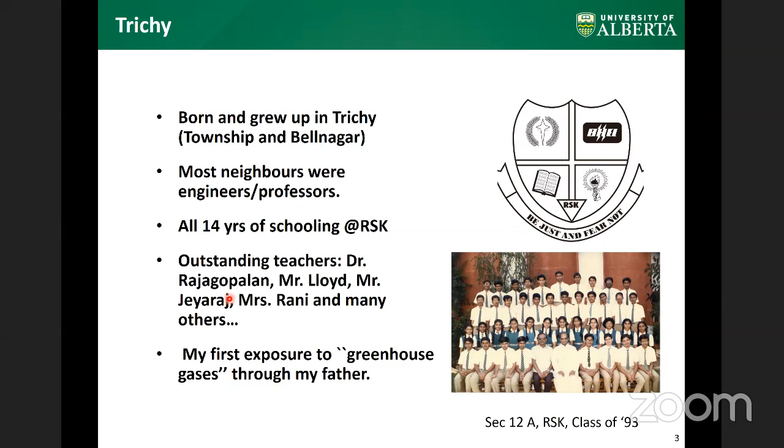So with that, I'll move into my technical talk. I've split the agenda into two. In the first half, I'd like to talk about CO2 capture, a very broad overview - I will not go too deep into that. Then in the second half, I'd like to talk about our research in this area: what are our contributions, and specifically our work on adsorption processes for CO2 capture. I will introduce what adsorption processes are, what the challenges are, and how we are contributing to overcome some of these challenges. Of course, this entire talk will make sense only if we assume that human-induced climate change is real and that CO2 plays a key role. I do believe that this is true.

This is a point of contention all around the world. It has the power to change elections. If you don't think that this is true, I would still urge you to look at this talk as a purely scientific talk, because the engineering challenges we face here are significant.

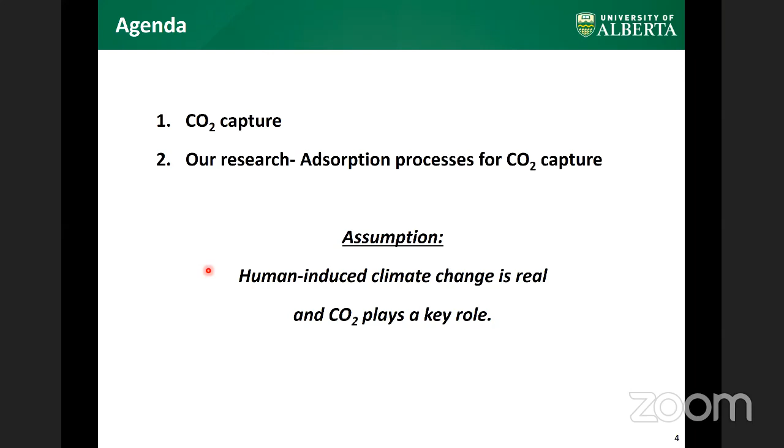This has continued to climb, although this year has been one of the first years in a long time where CO2 has actually taken a dip because of the COVID pandemic. But still, atmospheric CO2 compositions and concentrations start rising, and this is going at an alarming pace.

Many people consider a 1.5 degree change to be fairly catastrophic, in the sense that irreversible climate change could happen under those conditions. And many countries globally have seen this, have accepted this, and are taking measures to control it.

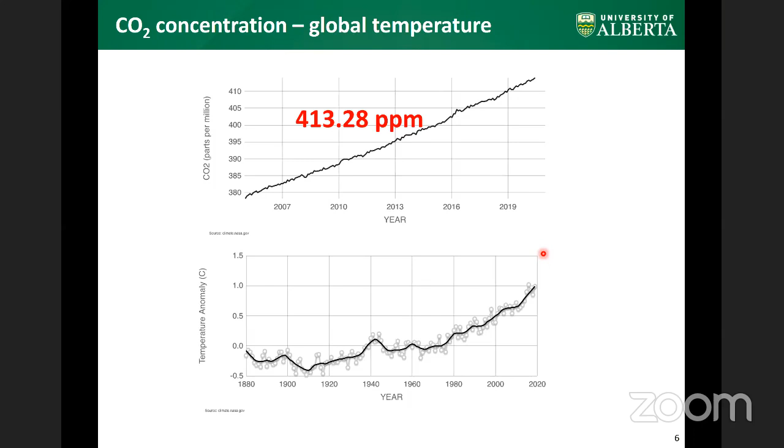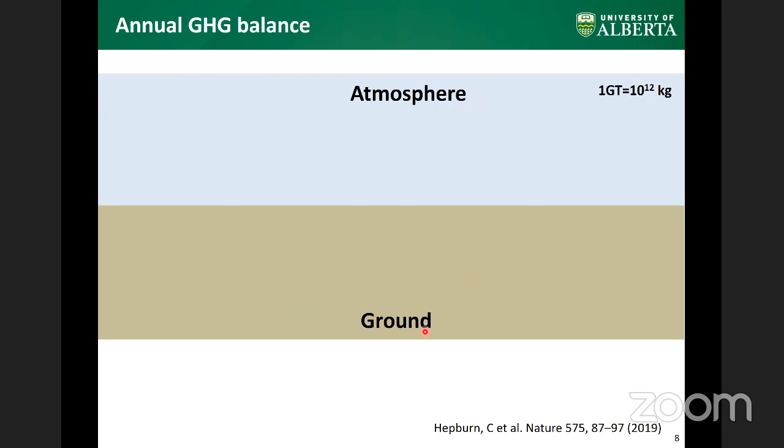If you consider the atmosphere and the ground, you can see that there are several contributions from the ground to the atmosphere, with energy, industry, and transportation being the big hitters. These are all represented in gigatons of CO2. One gigaton is 1 billion tons, or 10 to the power 12 kilograms. So what we are talking about is a fairly large amount of emissions that happen because of human activity.

As you can see here, this contributes to about 39 gigatons. For simplicity, you can think of 40 gigatons as approximately the amount of CO2 that goes from human activities on the ground to the atmosphere. Of this, India contributes about 2.37. On a global scale this is a significant number, but in terms of per capita emissions it tends to be low, and that is also reflected because our energy needs have been much lower than many other places.

Of course, there are also sinks, which means there are activities that take the CO2 and sequester it on the ground. This happens in two modes: ocean and land. These two are the biggest contributors, and they contribute to about 21 gigatons of CO2. So what you see immediately is that we are adding 39 into the atmosphere, and nature removes about 21, and this is on an annual scale.

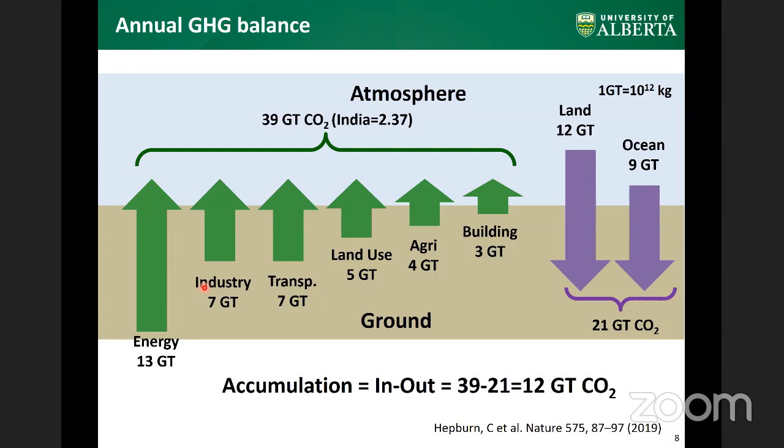So let us look at a conventional system. This is a very oversimplified picture of what happens. Traditionally, and most of the audience are no strangers to this, BHEL is one of the most renowned companies, and especially Trichy is the center for boiler making. So a lot of power generation happens through the contributions of many of you attending this talk.

What you see here is fossil fuel goes into either a power plant or a chemical plant, and as we all know, fossil fuel contains predominantly carbon and hydrogen. These are the two big atoms we are interested in. The way I've learned from colleagues much more knowledgeable than me is to imagine fossil fuels as containing two atoms, essentially carbon and hydrogen. Hydrogen is where you get the energy from, whereas carbon gives you the density.

So the higher the percentage of carbon, the denser the hydrocarbon tends to be. That is why methane has four atoms of hydrogen to one atom of carbon, whereas oil contains approximately CH2, give or take - so four becomes two - and coal contains CH, so essentially for every atom of carbon you have one atom of hydrogen. That is the reason you see that as you go through this chain, the density changes, and of course you make the transition from a gas to a solid phase.

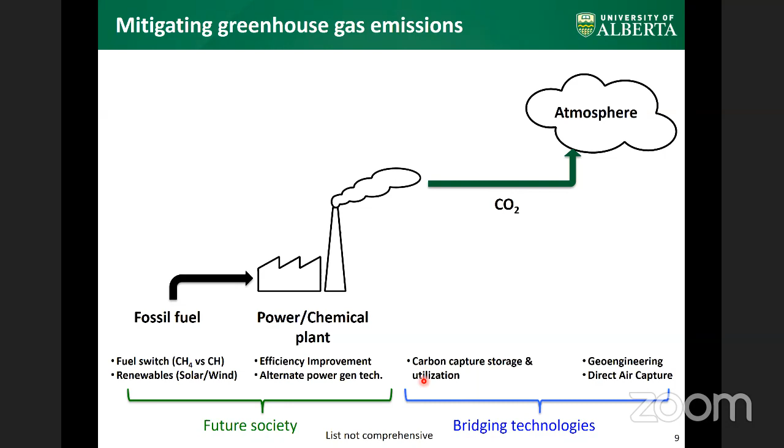So many scenarios that people are looking at consider fossil fuels being increasingly used only for producing chemicals, whereas we look to other sources for producing energy or power. Provided we have these carbon sources, and if we want to stop these carbon molecules from ending up in the atmosphere, even in those scenarios, carbon capture and storage becomes an important tool. This is the topic I'll be talking to you about today.

So what is the concept of carbon capture and utilization? Let me show this to you in a very simple schematic. I should thank Professors Karimi and Farooq from NUS who helped me develop this framework. The traditional framework is the following: you have a power or a chemical plant.

We take fossil fuels or any carbon-based fuels, and the main idea is to produce electricity or energy, and/or chemicals if it's a chemical plant. What we produce in addition to power is a CO2 stream, which is typically called flue gas.

Depending on what you're burning, you can end up with CO2 concentrations anywhere between 5 to 40%. For example, if you burn natural gas, your CO2 concentration typically is in the range of 4 to 12%. Coal gives you anywhere between 12 to 15%, and so on.

So you have a fairly dilute stream, and this is where the big challenge arises. The idea is that we build a capture plant to concentrate the CO2 that comes in and to enrich it, typically beyond at least 95%, because any contaminant could affect your downstream operations, and you'd also spend a lot of energy if you want to store the CO2 underground. You have to pressurize it to about 120 bar, and you might end up spending a lot more energy compressing everything but CO2. So there is a huge necessity to concentrate this from about 5 to 95%.

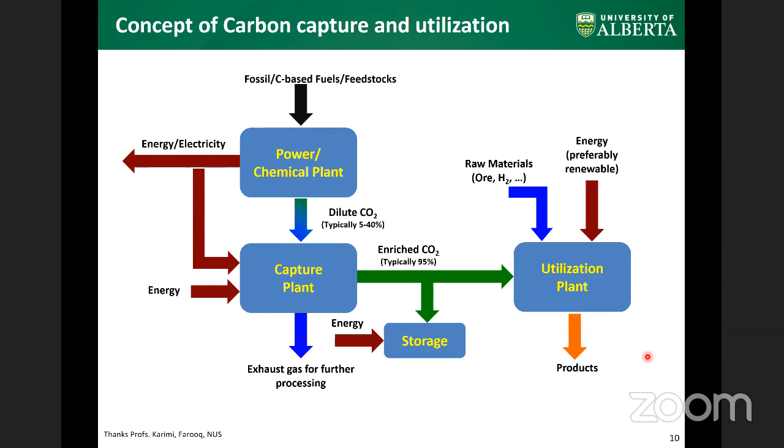And then you make products. The products we produce have to have long-term sequestration potential. For example, a common assumption is that we can put this into soft drinks, or even convert it to urea. But if you look at the life cycle of these approaches, the CO2 molecule eventually ends up going back to the atmosphere within a very short period of time. So we need to think of very long-term sequestration potentials.

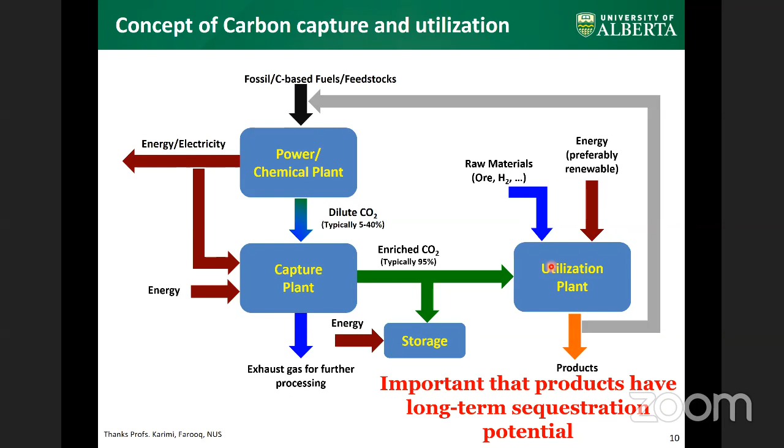The other point to note is that parasitic energy, shown here in red, is rather unavoidable, and we need to find better sources of this energy.

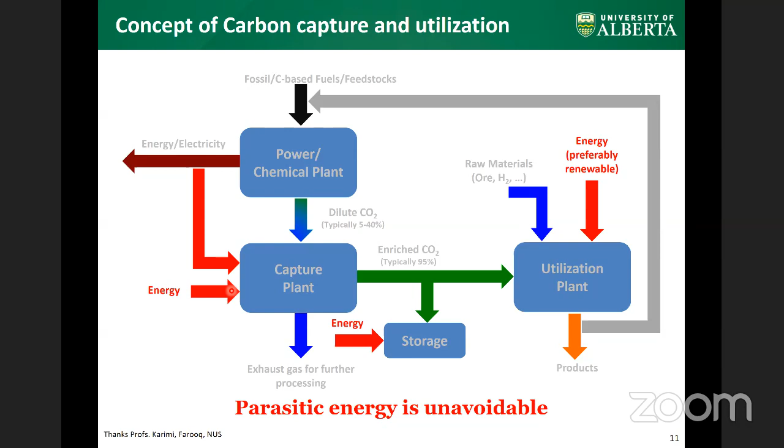Here is the carbon capture and storage schematic published by the IPCC, the Intergovernmental Panel on Climate Change, a long time ago. I would say this is a fairly reasonable representation, although the specific components have evolved over time. The idea is that we start with many raw materials such as coal, biomass, oil, and gas.

So they all come into industries, electricity, cement, and other industries. And the CO2 that is being produced here can be stored in different ways.

For example, ocean storage is one where we try to store the CO2 in saline aquifers under the ground. Geological storage is where most activity has happened.

So these are depleted oil wells. It's a place where there is space available, and there are also formations which have to be monitored and characterized. The idea is to pump CO2 under the ground, cap it, and monitor it to make sure it does not come out.

This has been a fairly controversial subject as well, because people are naturally worried that there would be cracks that happen in the ground and CO2 might come up. But on the other hand, there are also several projects that have successfully managed to do this.

Of course, the other option is to use it for what is called enhanced oil recovery, where you try to pump CO2 to remove oil that was otherwise difficult to remove. In these mass balances, you very often see that there is still a net CO2 storage potential as compared to the amount of oil that you will take out. So very often these aspects have taken shape.

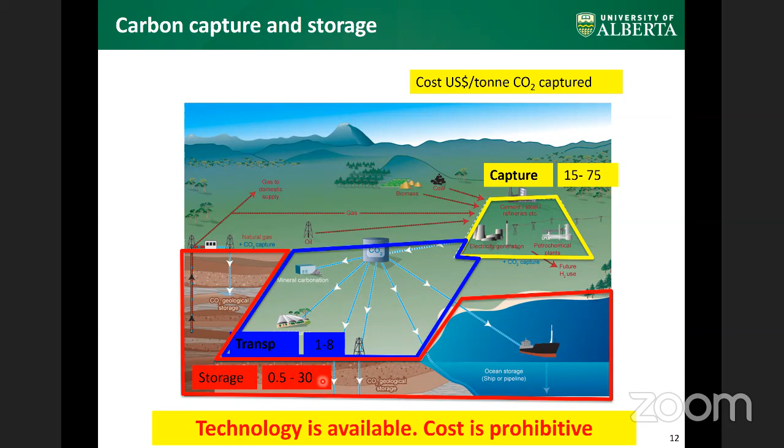So the transportation takes anywhere between $1 to $8 per ton. And finally, storage is anywhere between $0.5 to about $30. So if you look at this entire chain, you immediately realize that capture is where most of the expenses are. But it's also important to point out that there is technology available for each of these steps, it's just that cost is generally what is prohibitive.

So if you look at carbon capture, especially in power generation, we could look at it in these ways. There are different ways in which power is generated. The most common, I would say the biggest contributor to power, is what is called post-combustion.

These are typically the kind of combustion cycles that we see in most places, because this is the cheapest, and this has been historically the most advanced in terms of history of advancement.

So the idea here is that we burn fossil fuel in the presence of air, which contains about 20% oxygen and about 80% nitrogen, give or take. And what you produce in the combustion is CO2 and nitrogen, and of course you produce power.

And the idea is now to concentrate the CO2 here. So you put a CO2 capture unit, and then you compress the CO2 and send it out for storage. So this is called post-combustion.

This is important because, as you can see here, the CO2 capture unit is built downstream of an existing combustion unit or existing power plant. So this means it can be retrofitted to any available power plant, and there is a lot less interaction with the power plant itself. So in terms of reliability, it tends to be fairly high.

But on the other hand, the biggest challenge, as I will talk to you later, is the conditions at which you get your flue gas.

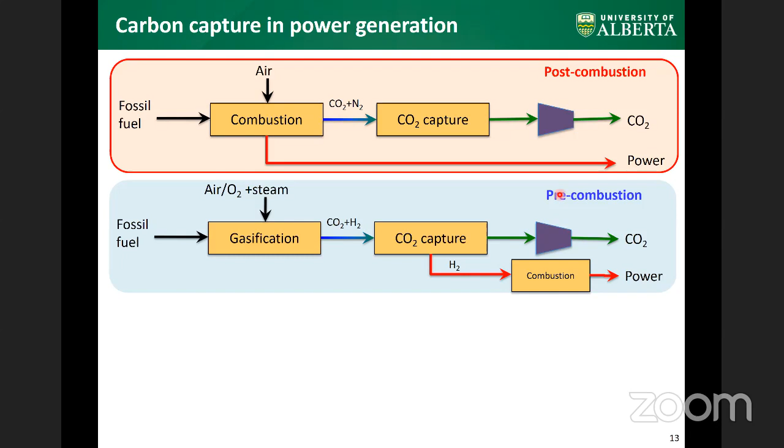The third one is oxy-fuel, where you take air and separate it, removing all the nitrogen so only oxygen goes into the boiler, and you burn that with the fossil fuel. What you get here is fairly high purity CO2. Of course, this means the temperatures here would be very high, and there are also other operational issues, as I understand. There is a possibility of recycling CO2 to address that. For some reason, oxy-fuel has not taken off very much in the industry.

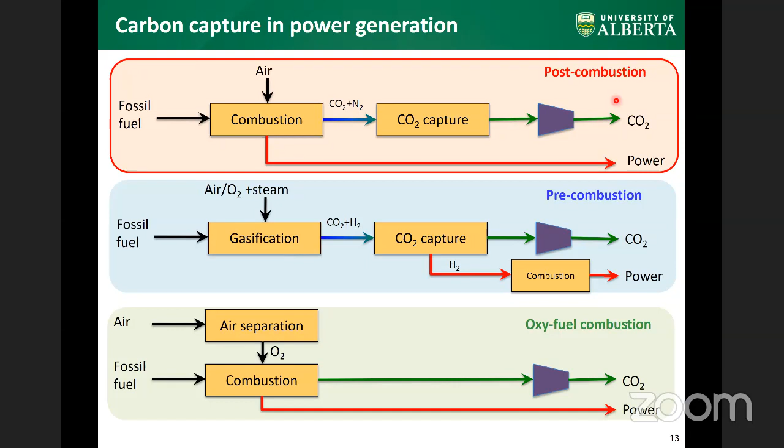So what I'll do is focus on post-combustion for the rest of my talk. This is a typical plant, I don't have to explain this — I'm sure everyone in the audience today is involved in this in one way or another.

This is a typical coal-based power plant. I'm looking at a classical 500 to 550 megawatt power plant. You burn coal in the presence of air, and it produces close to 55 to 60,000 tons of flue gas per day. A good number to think about is for 500 megawatts, we produce close to 10,000 tons of CO2 per day. The challenge is that this comes out at atmospheric pressure and at or around room temperature, depending on emission standards and how much heat has to be recovered.

You'll see variability in this, but this is a good picture. So we need to now perform the CO2 capture. We need high purities, and if you look at some requirements, for example the US Department of Energy, considered a big player in this, they set regulations requiring that 90% of the CO2 that comes into the plant ends up in the product — what we call recovery or yield. As a chemical engineer, you immediately realize that as you expect to remove more and more, the challenges increase. This has to be done while removing as little power as possible and with as little capital expense as possible.

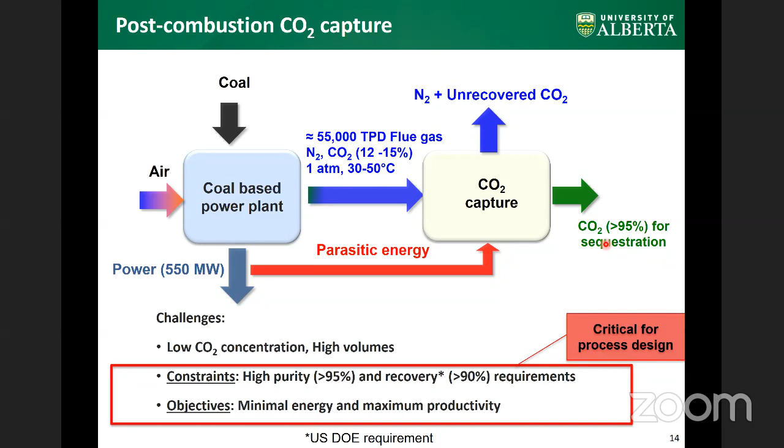The two projects that I would like to highlight, not just because they are from Canada, but these tend to be the biggest in scale. One is the Boundary Dam project in our neighboring province, Saskatchewan.

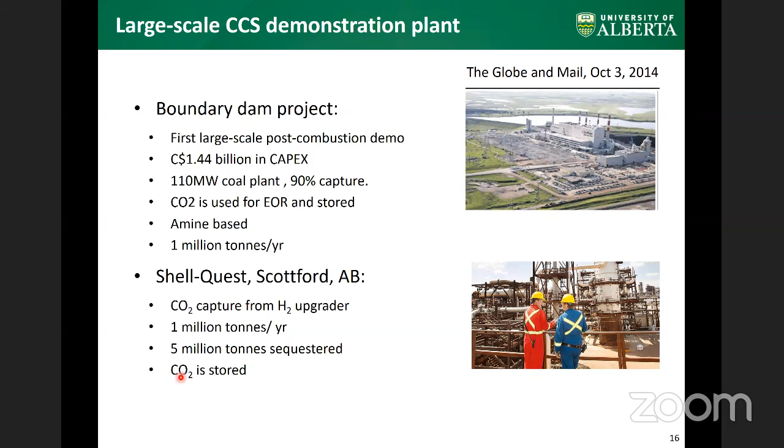So this is the process at Saskatchewan, the Boundary Dam. This is a classical process, one that is taught in undergraduate classes and heavily used in the industry.

So now we have this technology. What is the challenge, right? This is a mature technology, but the amines are very prone to degradation, and this is a very acidic environment, so the walls of these huge towers tend to corrode.

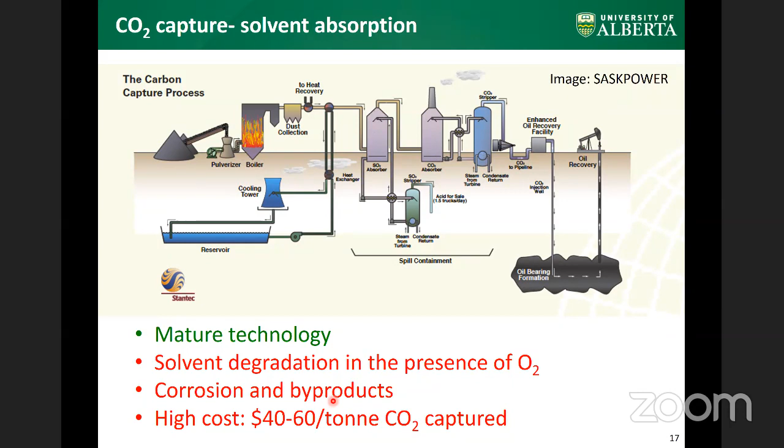So what is it that we do in our lab? This brings me to part 2 of my talk. I've given you an idea of what CO2 capture is, why it's important, what technologies are available, and what the challenges are with those technologies. Next, I'm going to talk about what we are doing in our labs, so you also get a glimpse of the kind of activities we do.

So we use a different process, which is called adsorption. This is not new — I think most of us have an adsorbent at home in one way or another.

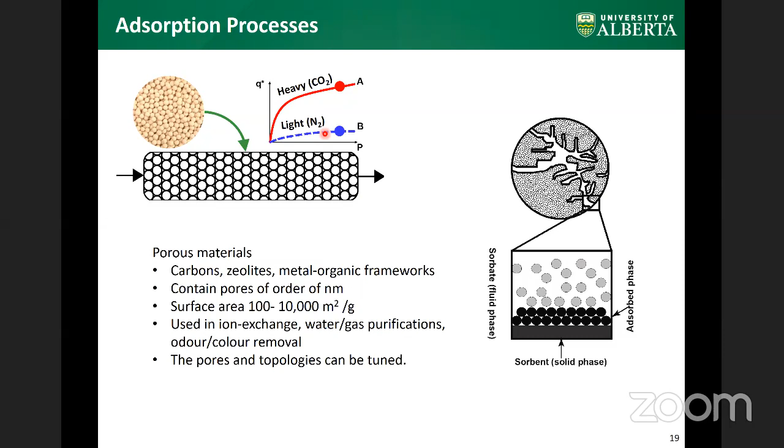So what we do is take some of these materials, put them in a column like this, and send a mixture of CO2 and nitrogen. I'm going to show you how this transmits through the column. Let me see if I can get this started. As you can see, originally the column has none of A and B. When you start introducing the mixture, since B has a lower affinity to the solid, it propagates earlier, which means if you start measuring what comes out of the column, you start seeing...

...a pure nitrogen breaking through the column. If you wait there long enough, you will get nitrogen in pure quantities, and slowly the CO2 will start coming out. So what you have here is an opportunity to collect the nitrogen in pure form.

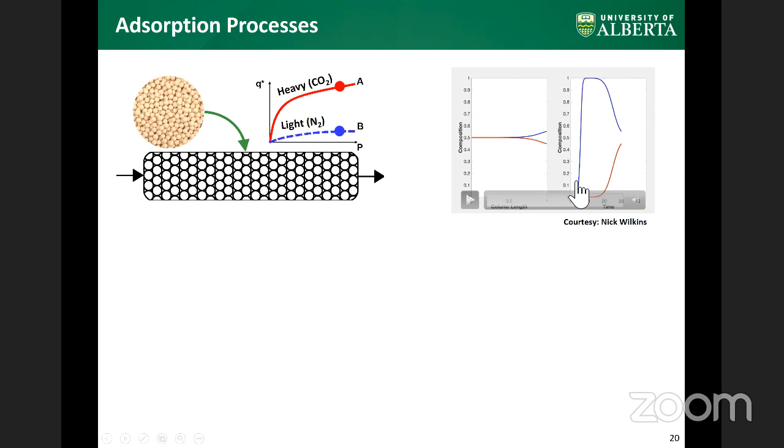This is in fact the exact technology used in medical oxygen concentrators, which have come back into the light especially after the pandemic. In this case, you use a zeolite which absorbs nitrogen but does not absorb oxygen to a great extent. This can be used to make oxygen concentrators that typically concentrate oxygen up to about 93 to 95%. It's also used in huge hydrogen plants where hydrogen is purified.

The point I want to make is that the technology is available to go anywhere from 3 normal meter cube per hour to about 400,000 meter cubes per hour. This is a huge range, but still not huge enough for a process like CO2 capture that we've been talking about.

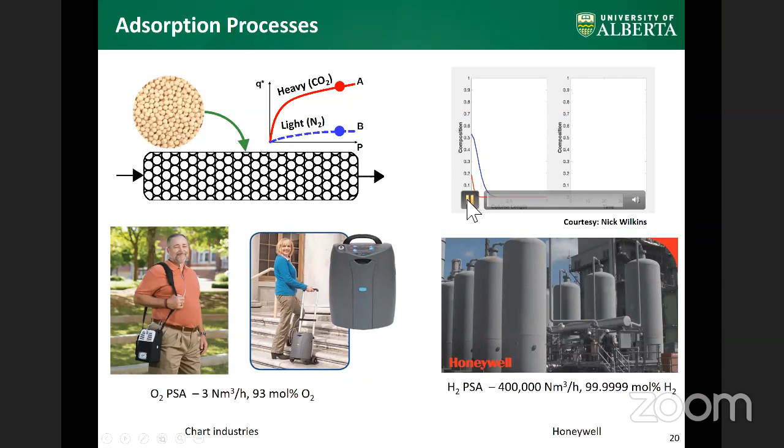In these processes, the cycle alternates between two steps: adsorption and desorption. This is because when you let the entire column become saturated, beyond a certain point you cannot use the solid anymore since it's completely saturated. So at that point, you have to clean it. This is exactly what they'd call in the boiler industry, for example with an ion exchange resin, a backflush. When you do a backflush, you're desorbing everything.

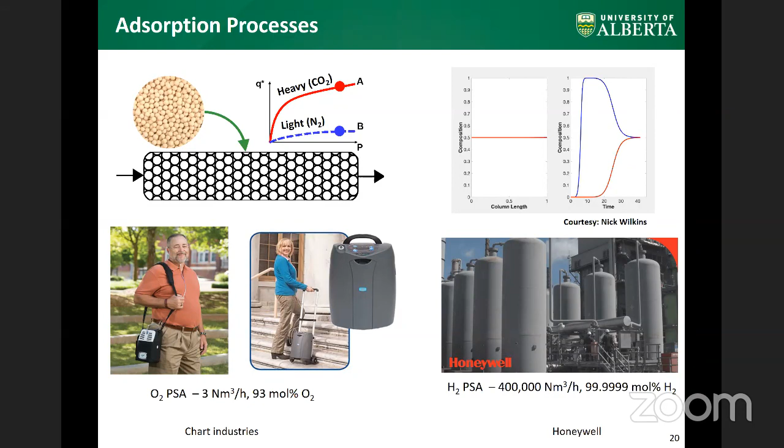But when you're dealing with a gas, you have two main ways to do this: you can reduce the pressure, or increase the temperature. Reducing the pressure is called pressure swing adsorption. Increasing the temperature is called temperature swing adsorption. Both are available options. Our group has worked a lot on using PSA for CO2 capture.

Before we go through this, I'll highlight that if you put in a feed, you get two products. One is called the raffinate product, and the other is called the extract product.

If you compare adsorption processes to those taught at undergraduate level, like distillation and absorption, the key difference is that this is an unsteady state operation. So there are no explicit steady state design principles available to design these processes. This is a huge issue when designing these processes, and that also explains why they're often not taught at an undergraduate level in a rigorous manner, because in chemical engineering design we almost always teach steady state design, whereas these processes inherently operate under non-steady state.

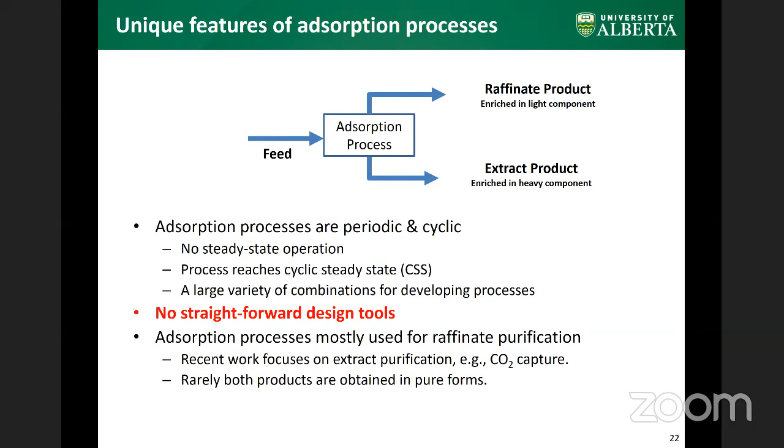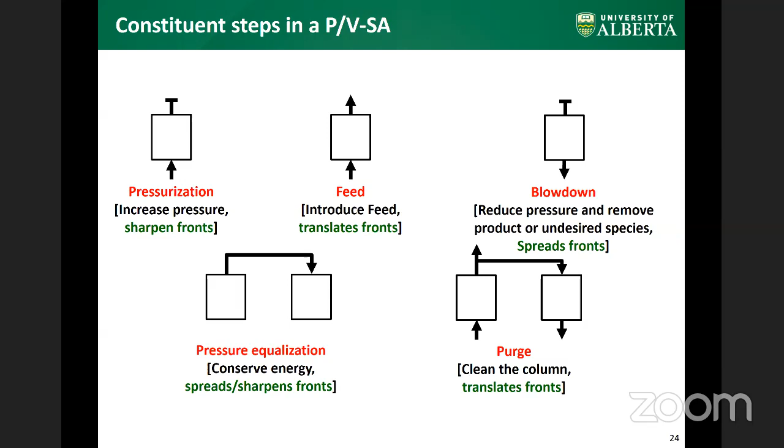So what you see here is that these tend to be like building blocks - you can start combining these steps to make a process. For example, here's a very simple process, but the point I want to underline is that you have several variables to play with. You can change the velocity at which you put this in, you can change the adsorption time, and you can change the pressure levels at which you operate the entire system.

So in summary, for a very simple process like this, you already end up with about 8 operating parameters. The question of how do I pick these 8 operating parameters so that I maximize the potential of the system becomes a fairly challenging problem.

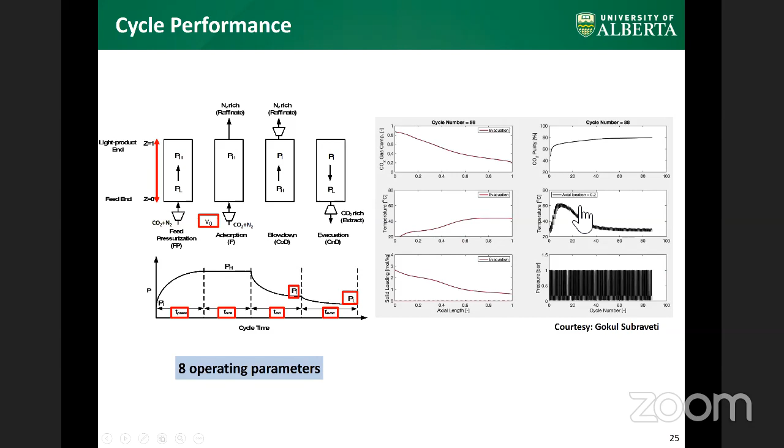And this is exactly where it becomes difficult - if I give a certain set of input variables, it becomes very difficult to predict what the process will give us. For this, I'll skip ahead for want of time, but what we do now is figure out how to pick these parameters.

What we do here is a technique called optimization. We have a full model - essentially the set of equations I showed you before - and we have what's called an optimizer. The optimizer takes a random combination of all of these and sends it to the model. The model evaluates how the process will perform, and then it throws it back as performance indicators. These performance indicators could be energy consumption of the process, for example, or the purity of the CO2 that I achieve for a given set.

If my purity does not reach a certain value, I don't want that to happen. So if you do this over thousands of unique combinations, we get what is called an optimal front. Each of these points is a unique operating condition. I'm plotting purity and recovery. In any process, I want high purity and high recovery, so I want to be as close as possible to the top right corner. As the optimizer keeps doing this over and over for thousands of operating points, you slowly end up with what is called a trade-off plot, called a Pareto curve, named after an Italian scientist, Pareto.

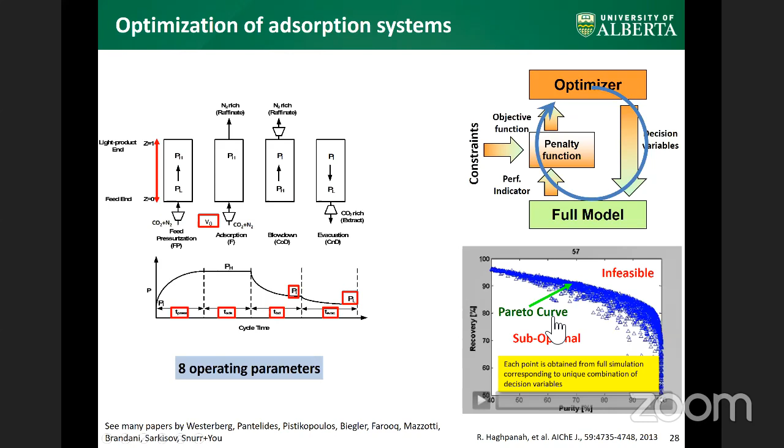What you see here is that this boundary separates the region into an infeasible region, which means with this process and the material I have chosen, I cannot reach any point here. I have to be contented working in this region, and if I want the best performance of the system, I want to be working exactly on this curve. So this has stopped you from doing thousands of experiments and spending time and capital on human time, machine time, and consumables, and it has already given you a region where you should be looking to operate this system.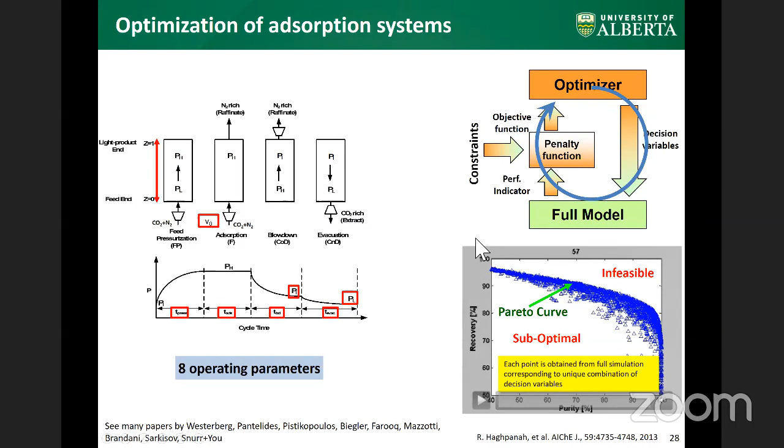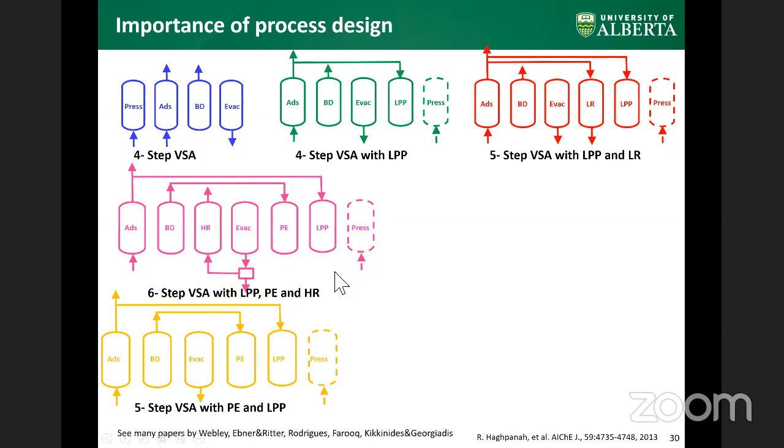Now you can start building very complex processes, and if you ask me which of these is going to be the best, it's very difficult even for experts to say. Each of these colors represents each of these processes. The same material operating within the same operating range, but just changing the configuration — the x-axis is purity, y-axis is recovery — can completely change the outcome of the process.

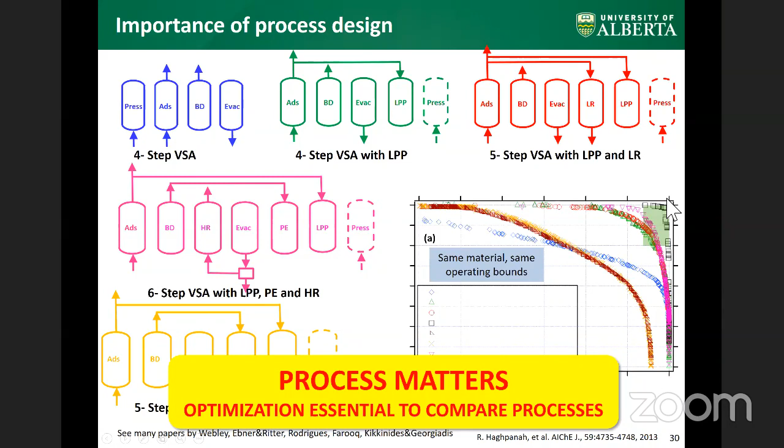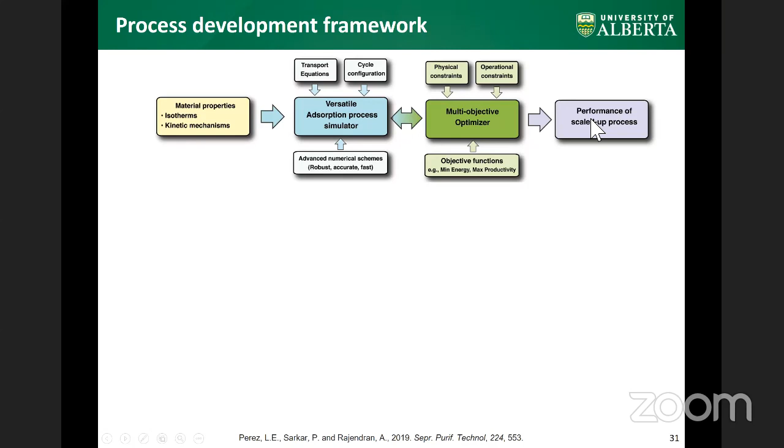What we have developed, and when I say we, it is the scientific community, the whole goal is to go from material properties, using model-based optimization, to predict what happens at large scale. And of course the big question in your mind is, does it work? The answer is yes.

For example, this is a project we did with a company here that makes oxygen concentrators for aquaculture. We made measurements based on 350 milligrams of material, and they ran experiments up to about 750 kilograms of material. We can predict, with no extra fitting parameters, the purity from this 750 kilogram machine to about 1%. The recovery we were off by a few percentages, and the energies are very close. This is a 2 million times scale-up, and we do this to make sure we are looking at the right ranges and the models are reliable.

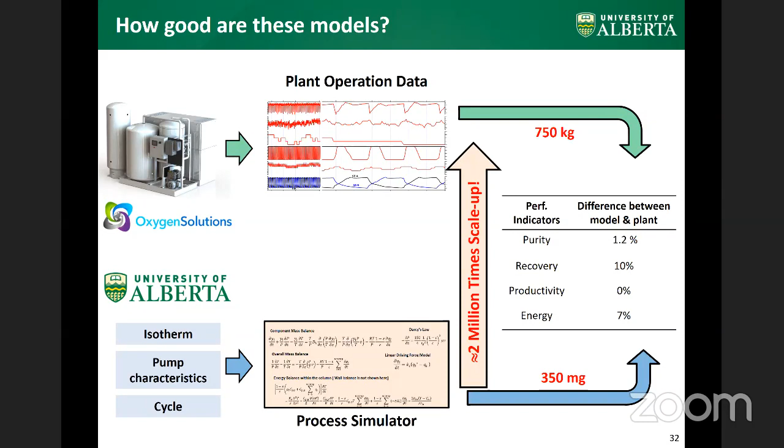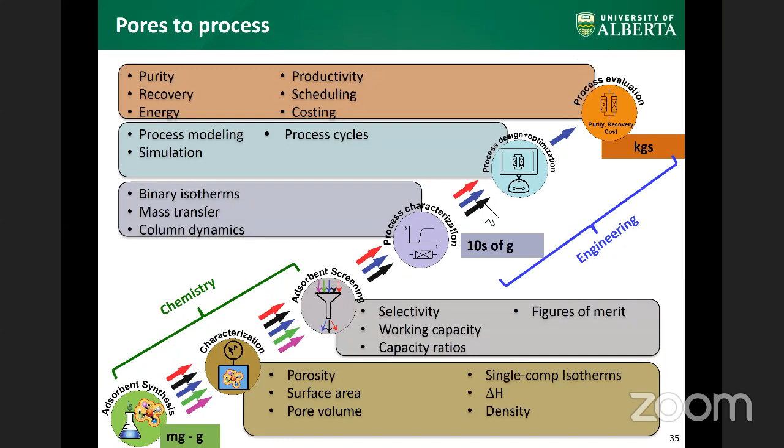Maybe I'll skip this for the time being and gladly answer it at a different time. But what I wanted to emphasize is here.

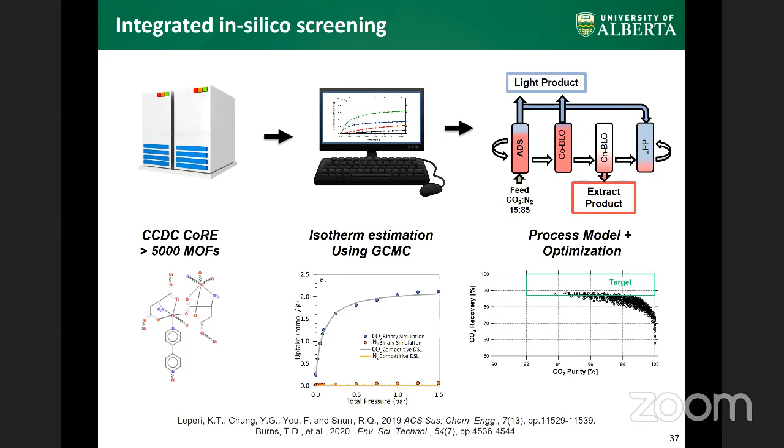We are at a position where, based on crystal structures which chemists measure on very small quantities, it is now possible through computers to predict thermodynamic properties and feed them into computer-based process optimization, so we can screen over thousands and thousands of these new materials and ask which of these materials makes sense and which should be scaled up. We did this by screening a database containing about 5,000 specialty materials called MOFs, and we were able to identify a whole bunch of adsorbents that can do better than the state-of-the-art liquid scrubber. This was a huge effort, representing about 5 million unique combinations, and it took us a couple of years of computational time. But the idea is that you could now use these approaches for making decisions about which material to choose.

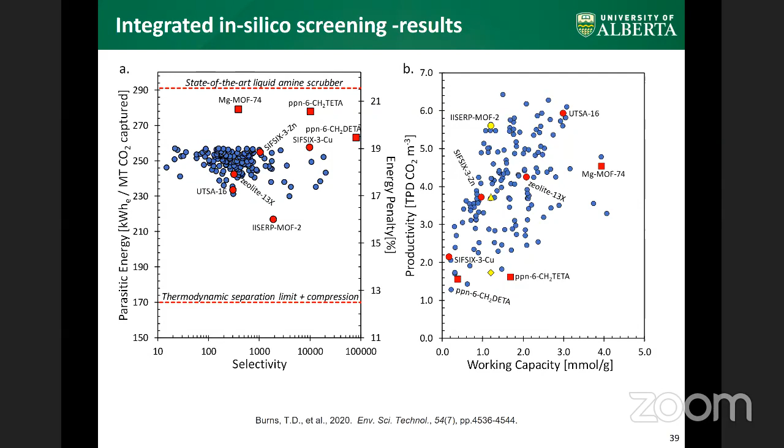So I'll summarize. When I summarize, I have to be very clear that the best design is to avoid the creation of any waste.

So if you can avoid CO2, that is the best way to do things. But if it is unavoidable, then we have to think of approaches like the ones that I have mentioned. And there are sectors in power, chemical and cement that cannot be replaced by renewables. And CCS is a technology that allows us to reach net zero emissions.

And finally, CCS is an expensive area, but that is why there are a lot of research projects going on, and it has to happen both in academia and in industry. Ultimately, I would say the price of carbon will decide whether this will work or not, and this entire thing makes sense only if carbon has a price.

This is also to let you know that if you have young people that are interested, clean energy is a big challenge. It's a global challenge. And if they would like to be challenged in these kinds of areas, I would urge them to start pursuing studies in this area. So with that, I conclude, and I'm happy to take questions.